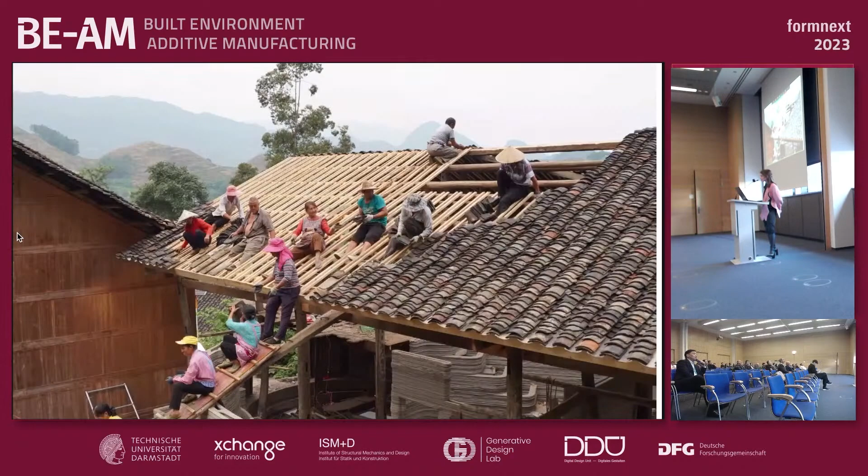I have to use sustainable materials, I have to do this and that. But actually, I think a good project is about who is involved in it and how it is built, and how you connect with everything that is on site, everything that is local, how your project is used after it's finished, and if it's a renovation, how you create a connection between the past, the present, and the future, and what's your take on speculating what this future is.

And of course, the biggest advantage, in my opinion, of technology is that it allows us to work within a world that is overbuilt without having to tear things down, but working upon what we already have.

I want to give a quick background on how I arrived at these conclusions. So the first project I want to present today, it's not the official title of the project, but today I framed all my projects as houses because all of them house something.

So this is a performative coral habitats project, but I named it Underwater House, and I was lucky enough to have this as my first ever client. A client from which I learned very much, and I was very humbled.

So this project was a collaboration between the Marine Biology Department at Hong Kong University and the Architecture Department. It was about, after 2018 when there was a very strong typhoon in Hong Kong that damaged about 80% of local coral habitats. So we wanted to create habitats in which we could place little fragments of corals so they could grow together, but the habitat would have a sustainable way of disappearing without damaging underwater conditions.

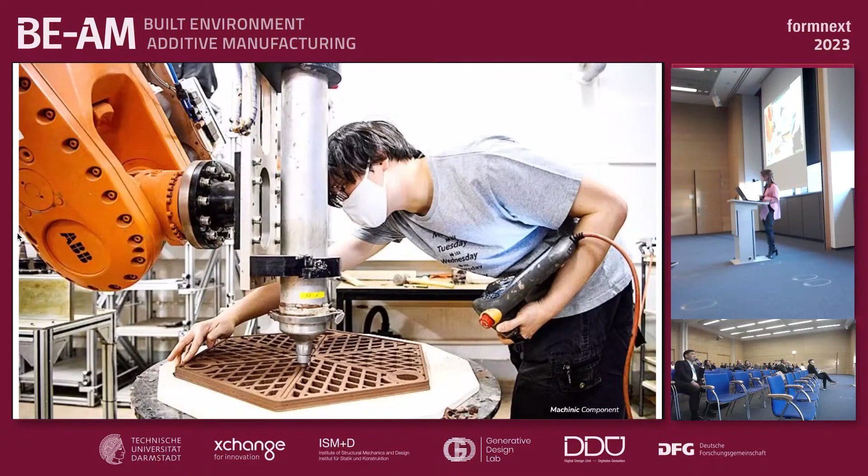So we had to bridge together the natural component, which is actually always changing. Nature is not something static. Even underwater, the coral species, there's never the same predominant species, they always change. And then we had to mix the machinic component that has its own behavior, and then the human component.

Because this project was a grant from the government, but it was going to be deployed underwater by amateur divers. So we had to make sure that we create a system that is easy enough so that someone untrained to stay underwater for large periods of time can take it underwater and assemble it.

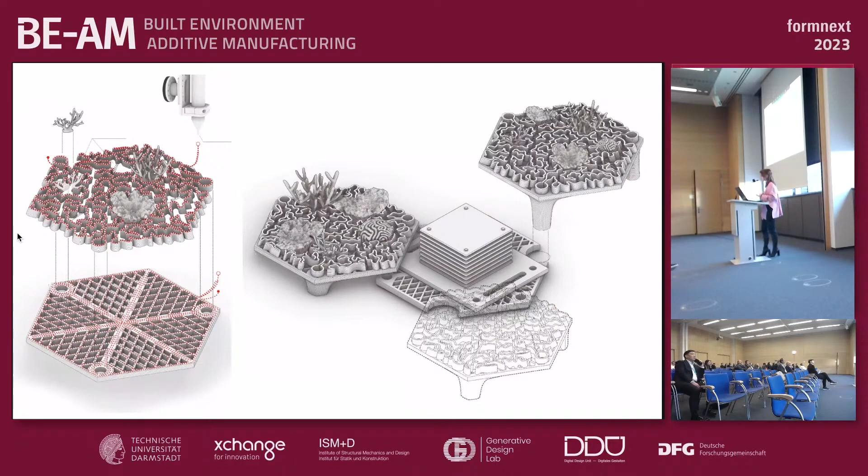So this was kind of the system that we created. Each tile is actually identical, even though with computational design and robotic fabrication, you have a lot of possibility of tailoring geometries. Actually, each tile had to be identical in order to be able to trace the results. So if the tile would have been different, we wouldn't have known if some of them perform better or worse, if that's coming from the geometry or from the corals themselves.

We had to do a lot of tests, of course, when you print with clay, which is a material that has its own behavior, that shrinks. There's a lot of calibration to be done.

We had to do a lot of calibration in terms of the tiles, which are formed out of two layers. The bottom layer cannot be solid because Hong Kong has urbanized reef, so there's a lot of sedimentation, and you need to make sure the corals don't get suffocated, so the sediment needs to be able to pass by. We also had to test different geometries to make sure the corals can grow within them.

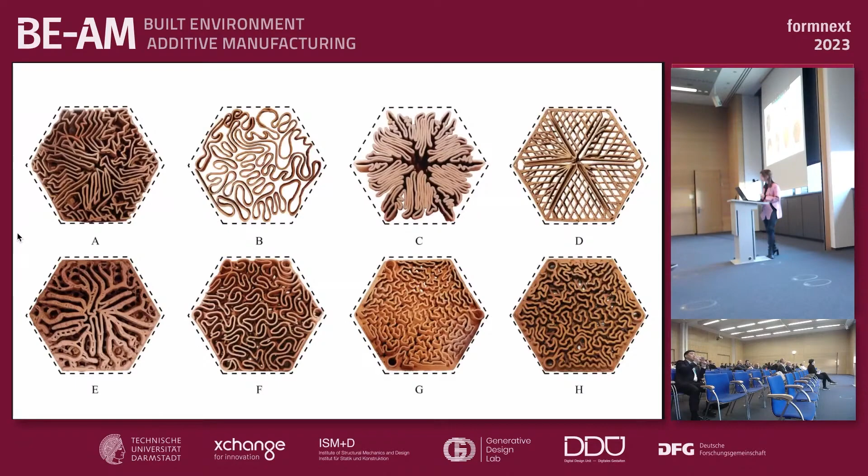Right now, most of the coral fragments have become a coral habitat by themselves, and they don't need the tiles anymore to survive. Since the tiles are clay, they'll slowly decompose within 3 to 4 years without damaging underwater conditions. Actually, they can be digested by various species that live in that specific water.

Happy client, happy designer.

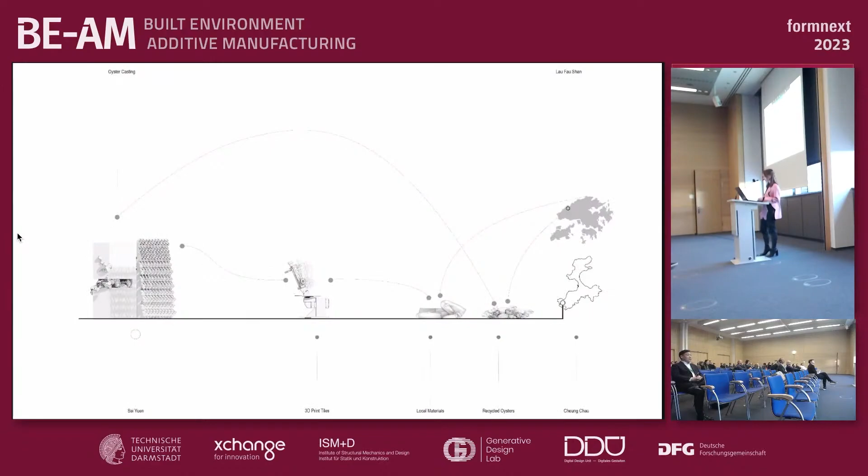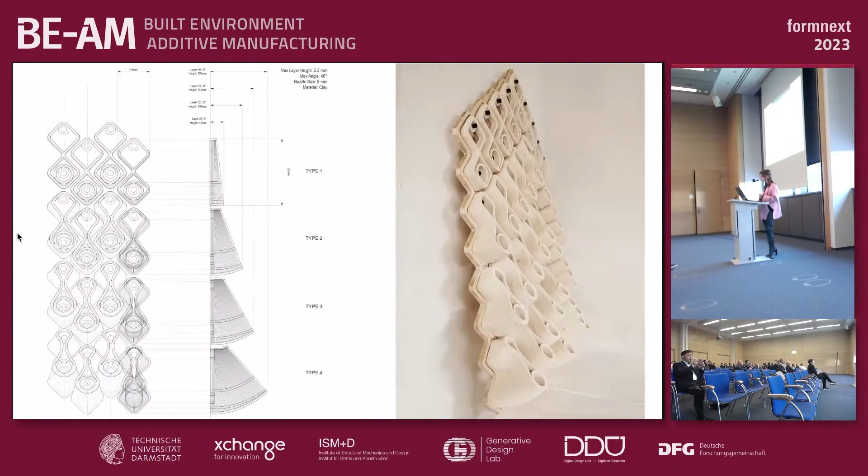The next project is the Oyster House, which is not yet a finalized project. It's a project combining two materials and two sites. Each material has its own form of fabrication: there's clay printing, where we've created specific tiles used as planters with a two-layer wall system, and then we're using casting with oyster shells.

The reason we're working with two sites: the first site is Cheung Chau Island in Hong Kong, one of the outskirting islands of Hong Kong.

In Hong Kong, something I discovered is that nature and the built environment don't need to compete. There are various ways in which they can coexist. Sometimes nature overtakes the built environment, and sometimes humans adapt to nature, but there's always this meeting of two worlds that's done somewhat peacefully.

Even though we think of Hong Kong as a metropolis full of skyscrapers, actually more than 60% of the city is a natural park.

This brings together another posture of Hong Kong, which is that the city revolves around the dinner table. The dinner table is the most important thing—it's a city of eating.

But that comes with its own implications. More than 30% of the waste in Hong Kong actually comes from food waste, and there are very few strategies for dealing with this.

So initially, when I discovered this, I started doing a lot of tests with my students, seeing if you could use various food waste as a material for 3D printing. I'm not going to get into that part of the work right now.

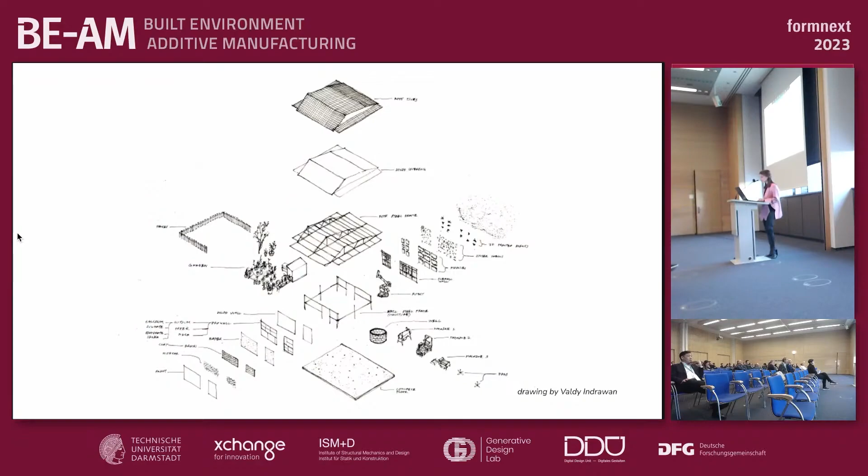I would like to play a video. Seems like you have to log in with your own account, or give us permission to view it because it's on my account. I think I already gave permission. You have to check your phone. My phone. I think that was the message before. I mean, it should have worked. Now it should be. No, it's not working. I'm not receiving the request. Can you log in? Sure. Your account? Where's the... yeah, sorry.

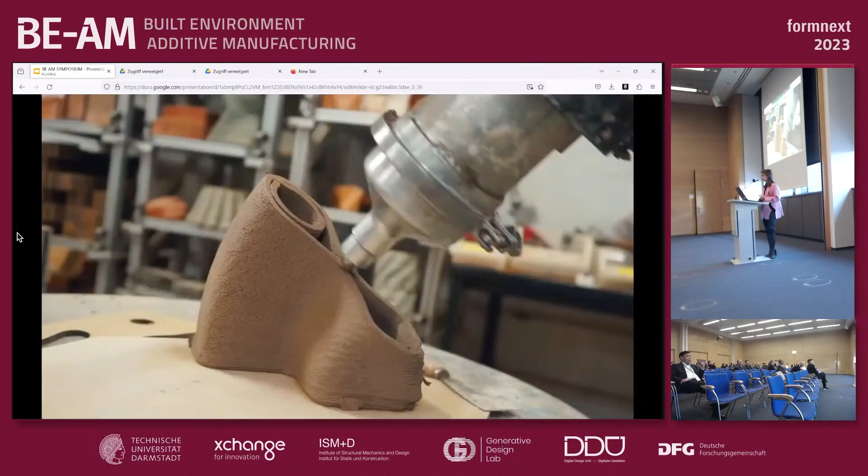The whole Lau Fau Shan territory is basically a village where you can find oysters anywhere - oyster trash in people's gardens, on the streets, next to the water, everywhere. So we went with students there, taking the oysters and bringing them back to the university campus for oyster casting, while simultaneously 3D printing using 6-axis printing and ceramic clay.

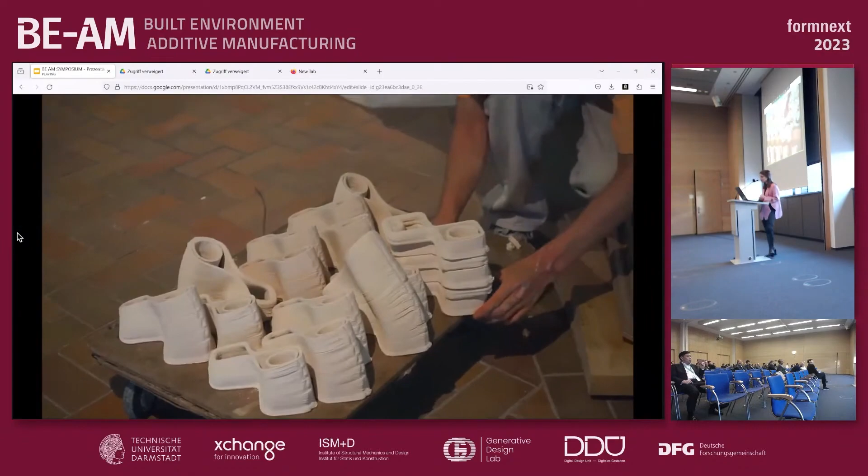We had to use a lot of different ways of transporting this, so we had to be very creative in how we thought about the building process. We couldn't just pack everything and send it on site because we have to pass through 3 islands in order to reach the site.

We harvest the oysters on the northern island of Hong Kong, then go to campus, the main island in Hong Kong, and then we had to go to another little island. For that little island, we also had to take 2 different ferries - the big ferry, and then a smaller sampan boat in order to reach our site.

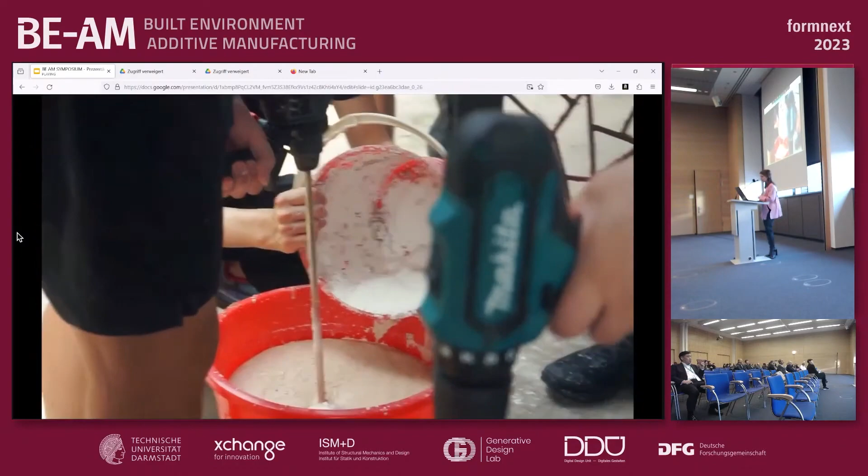So we had to always be very creative in how we transport things, how we manage to break things down, and take a lot of people with us so each of us can take a little part of the project with them - finding materials locally on this little island where the site is.

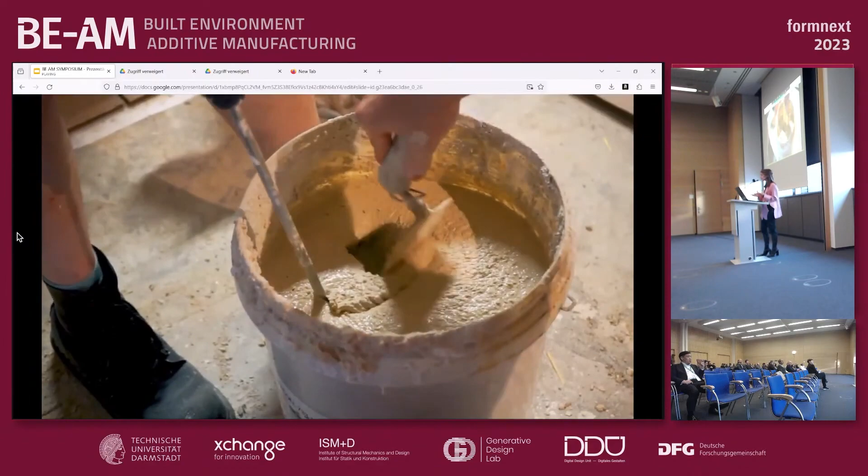We had to find sifus, old-school master craftsmen who work with their crafts, and we had to buy material from them and involve them in the process as well. The project is not finished - we're in 1-to-1 scale prototyping right now, but we did want to test the oyster casting in a 2-meter tall wall, and then the 3D printing system.

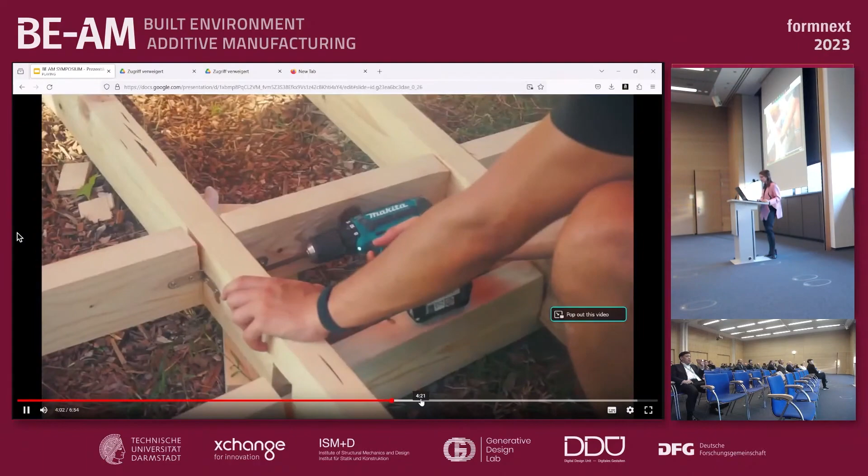And I think I will just go quickly through the video.

And maybe I can... yeah, and basically then the plants were also from the same village.

We tried to buy the succulent plants that nobody is buying, that seem like they're dying, because the site is a natural park and it's all about ecological building, harvesting and growing their own food, taking care of stray animals.

So we really had to be very respectful of the ethos of the project. Something I maybe forgot to mention is that each project I'm showing today has a different funding scheme. Part of building in reality is being creative with how you find funding for your projects, and making sure you still have enough agency, even though you may have a financial backer over you.

And the third transportation mode was, of course, biking for the students, once we didn't have to carry anything heavy anymore.

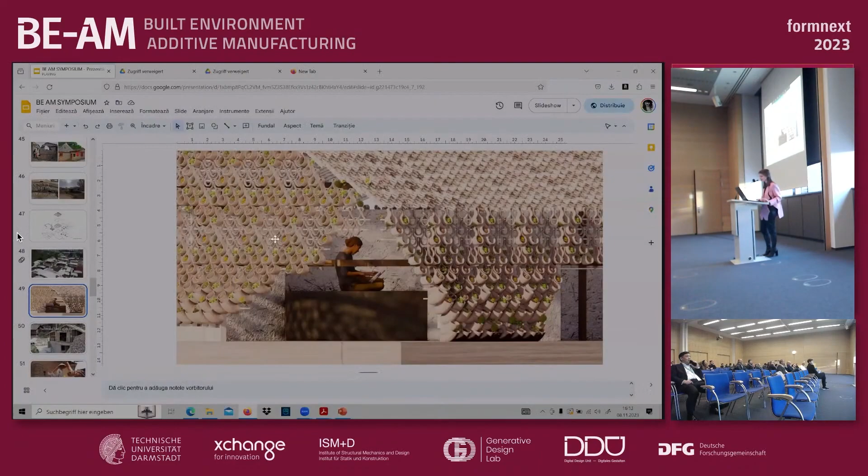This brings me to the project I started with today, Traditional House of the Future. This project was a collaboration between me and another colleague at Hong Kong University, also in the architecture department, but we came from seemingly very different worlds. My world was about digital fabrication, robotic fabrication, on-site and off-site, with very little to do with humans, and more related to the environment.

My colleague John Lin's work revolves around investigations in rural China, of course building himself, but also, by the time we collaborated on this project, he had just finished writing a book called Asphalt Houses, which followed and investigated how spontaneous builders, trained or untrained, in China, are reimagining traditional Chinese houses.

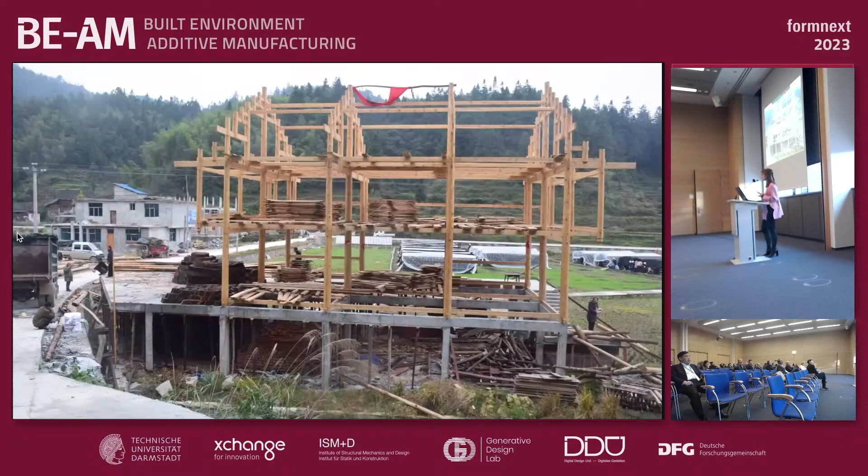One particular interest was the traditional wooden house, which is actually very easy to take apart and build back together. There are a lot of these weird collages between the old and the new, and the way people use their own houses.

In this truck, that's actually a house that someone is taking to another village. You can see there's always this tension between the old and the new, and even though it's very clear which is which, they still find a way to coexist.

And he ends his nights in the most traditional part of the house, where he lives with his family. This was something very important to us: to take into consideration how people live and use these houses, and to create a mix between the old and the new.

I'm going to show another video, but I'm prepared to talk on top of this one, so it won't be...

You only have the sound from the mobile in the microphone? This one is okay without sound. Yeah? But okay.

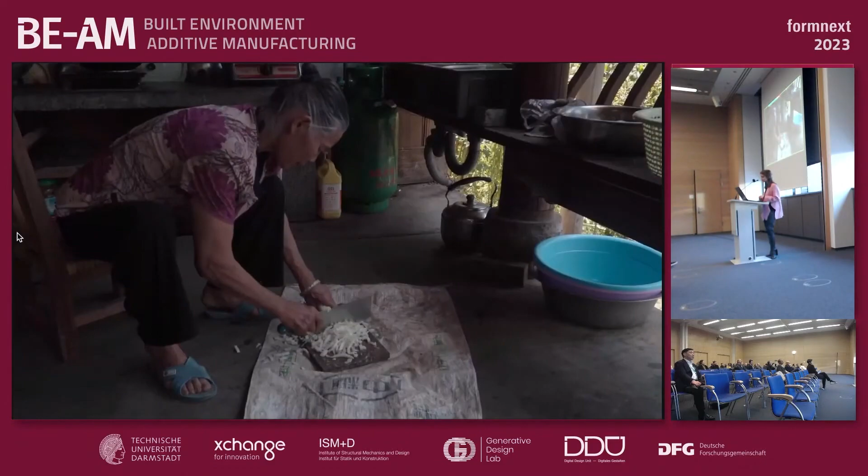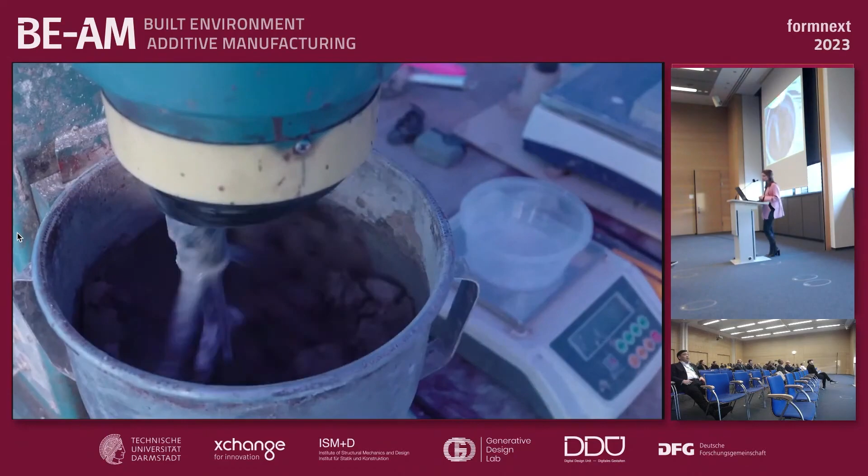There's something very similar in the way traditional woodworkers and robots work, which is not something you would expect, but both worlds do not really require the use of drawings. The traditional wood craftsmen work based on models, so we had to make small mock-up models and send them to discuss. And the robot, of course, operates based on code. So even though you may need a geometry, you don't need a drawing. That was something very interesting to see - how to create a one-to-one scale project, a real house, without having any construction drawings.

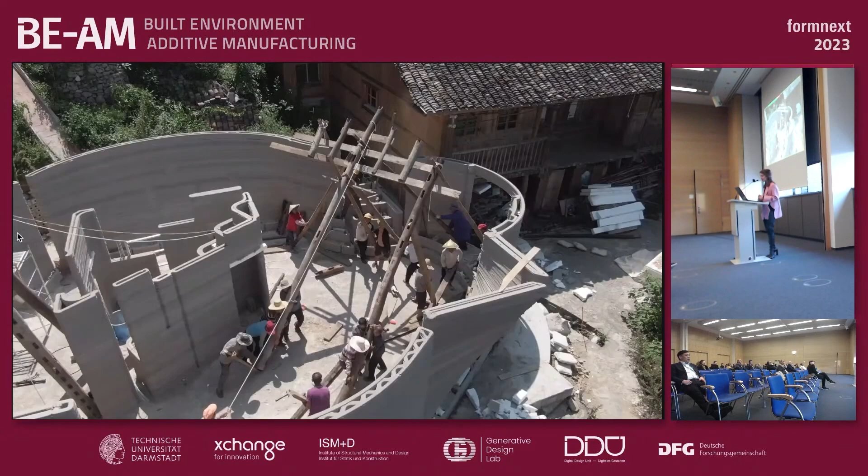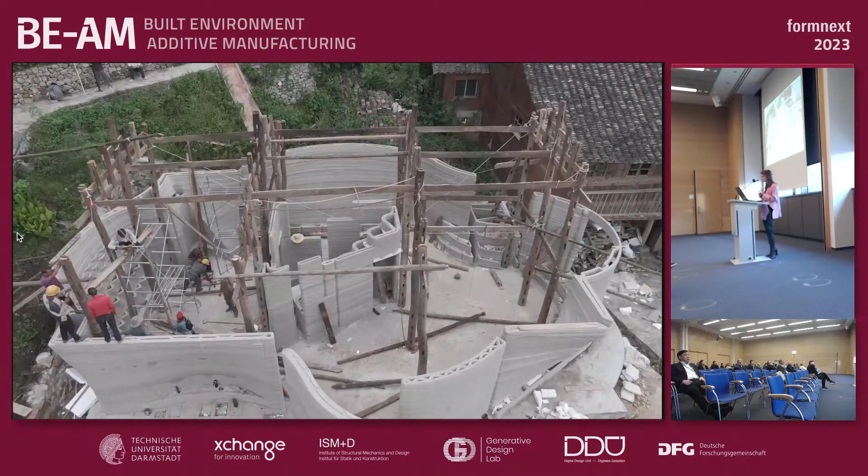It also required a lot of adaptation from both sides, so there was always this continuous loop between us working with the robots and the craftsmen. Traditionally these wooden houses are done by creating the structure flat on the ground and then simply erecting it. But because we scanned it and 3D printed everything to account for every little imperfection in the columns and create all these little nooks in the walls in which you can insert the original column, they couldn't do that. So they had to adapt their way of working and create ways of redoing the frames, reworking within the walls we had created. There was never a clear beginning or end to the construction process - it was always this loop between us.

Even untrained villagers were involved in the construction process, not only the ones who helped us assemble the roof and do the roof tiling, but also the ones who were cooking, cleaning, and doing the waterproofing. Because of course nothing ever works perfectly according to schedule, we didn't manage to finish building during the dry season. Part of the house was actually built during the wet season, and we needed a lot of help from the local villagers to waterproof everything.

The new addition to the house made it possible to go from a one-story house to a two-story house. The original house was quite tall, but the ground level was only for animals. But people don't grow animals anymore in the village, so we decided to transform the ground floor into human space too. We added all these modern amenities that people said they need and don't have, which is especially important for people with children - it's a big reason why they leave the village. So we created a bathroom, a modern kitchen, a courtyard, a living room, and a gathering space.

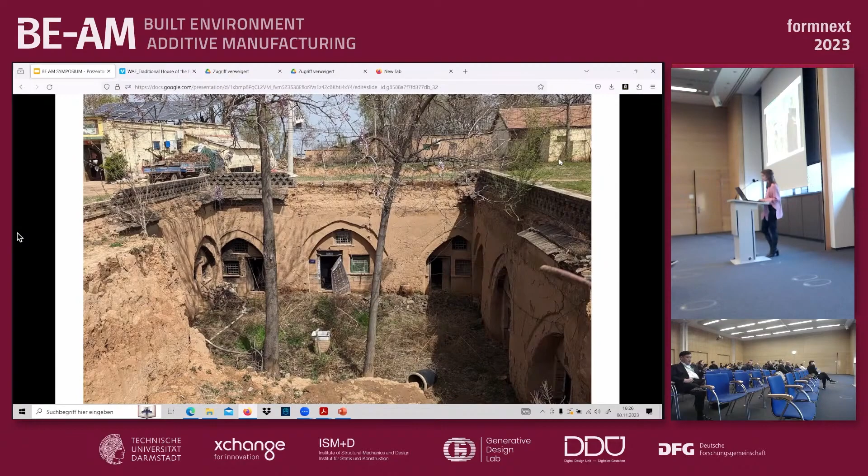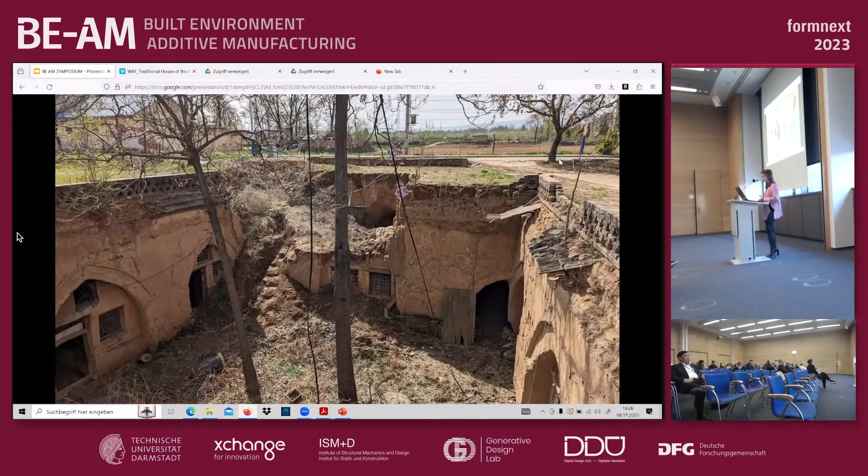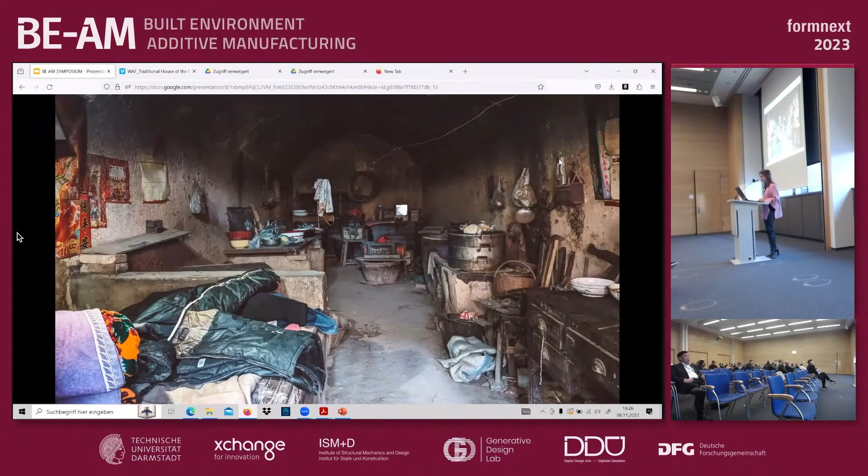But people still use these houses in modern ways. Even houses that seem abandoned are still occupied. This is a house the inhabitant's family has owned for the last 500 years, and he's still living there. This is his current bedroom, living room, and kitchen.

We're now working on a project which will create new rooms and new openings towards these rooms perimetrally, and a completely new courtyard system to transform the space into something called Red and White, which is dedicated to funerals and weddings, but it's not a public space. It's still owned by the family; they just do everything within the house that they own.